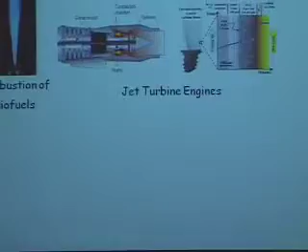Anyway, so what we've been doing is to try to understand the issues associated with how you protect these metal jet engine blades that operate actually at temperatures above their melting point. That should frighten all of you. You all take airplane trips, right? The flame temperatures in these engines actually are above the melting point of the metal alloy that's used for these jet engine blades.

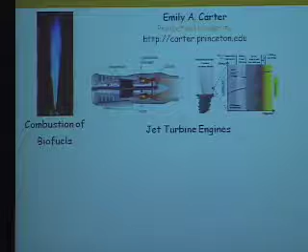How does that work? It works because they're protected by a ceramic coating, a very, very interesting multi-layer ceramic coating. We've been involved in understanding how to improve that coating so that one can operate at even higher temperatures and improve the fuel efficiency, or improve thrust if that's your goal for flying.

Okay, another area that was recently funded, we've done a little bit of work related to this. This is a very nice picture of the experimental fusion reactor that is going up in Europe that the Princeton Plasma Physics Lab has been involved in. They inspired me to start thinking about some of the materials issues associated with containing the fusion plasma. There are really important issues, as you can imagine. The temperatures get very high.

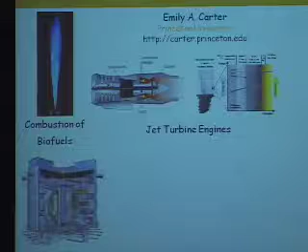There are neutron fluxes that come out of the fusion plasma, and the particular issue they asked me to think about has to do with tritium, which is a hydrogen isotope, getting into the metal that faces the plasma. So I'll talk about that very briefly.

I'll give you an example of what we do in this area and in this area, and the rest of it I'm not going to talk much about in the limited time available, but if you're interested, we can talk about it separately. Wole Soboyejo, I stole this picture from him. He works on lightweight vehicles. I also work on lightweight vehicles. We're interested in developing aluminum and magnesium alloys that can be used for lightweight cars, for any vehicle you like, ships, airplanes, cars, et cetera.

Obviously, that will improve their fuel efficiency. Another Energy Frontier Research Center that was just funded by the Department of Energy that I'm involved in, and also my colleague Miko Hataja is involved in, is looking at new materials for solid oxide fuel cells.

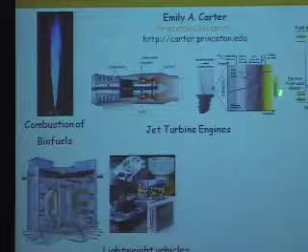The internal combustion engine is an incredibly efficient way of processing fuel. But another way that has tremendous promise for generating electricity is by taking fuels and actually running them through a cell like this that actually has the potential to be able to use dirty fuels even without problems. And so this is another mechanism for generating electricity, either from hydrogen or from hydrocarbons.

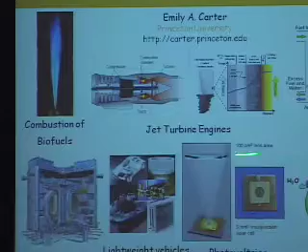And then lastly, I'll just say that I just found out that another Department of Energy grant that I had pending was funded to develop new materials for photovoltaics, so for solar cells. And I have another one pending having to do with essentially doing what's called photocatalysis, which is to take sunlight and make liquid fuels. And hopefully that's going to get funded too. So these are all the areas that we're working in.

And now I'll just spend a minute telling you, this slide is from one of my now collaborators, because he is part of the Energy Frontier Research Center. Bill Green at MIT put together this slide to just point out things that I don't even need to discuss in detail because Fred did such a good job already. But the point is we have to start thinking about a whole bunch of new fuels that are going to be coming online and how they operate, both understanding how to optimize their combustion chemistry and the fluid dynamics involved in the mixing of the chemistry and the thermodynamics with the fluid, with the gas, and how to then take that information to understand how to design new engines.

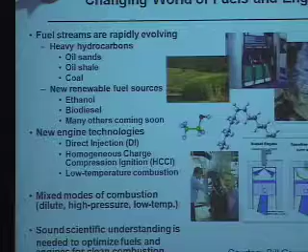There are a lot of new engine technologies that are being considered. They all have quite different regimes in terms of pressure and temperature that one needs to think about. And so this was the motivation really to go to the Department of Energy, Basic Energy Sciences, and say, we want to put together a team that goes all the way from molecules, which is where I live, all the way up to engines, to be able to optimize fuels and engines for clean combustion. And so that's my little bit here, from molecules to engines.

I should say the Department of Energy put out a call for proposals. They received 261 proposals. They funded 46 proposals. We're the only one funded on combustion. And Ed Law, who unfortunately is not here, he's the director. He suckered me into being the co-director. And we don't yet know who the associate director will be.

There are 15 people involved, including Fred and Yiguang Ju, who's listed here. Yiguang's on the steering committee. Bill Green I already introduced. There's people here from Sandia Combustion Research Facility, which is out in California, who are experts, and then also experts from other universities, as well as someone from Argonne National Labs. And the idea is that all of us together are going to cover these areas of expertise, both theory and experiment, chemistry, flames in terms of the fluid dynamics, and also engine design. And so this is really nascent. The money is not here yet. Okay, so we're just starting to think about how to put this together, and we're all very excited about it.

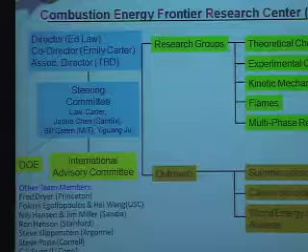So, do I have a minute or not? Am I done? Should I be done? Okay, I'll just do this one slide then. I hate it when people go over, and I don't want to be a hypocrite.

So anyway, this is just one example of the kinds of things we do in terms of materials. We are interested right now in the material tungsten, which is the prototype for one of the interior portions of this fusion reactor. And there are good reasons why one might want to use tungsten. You remember tungsten is actually the filament inside your light bulb, and it happens to be able to exist at very high temperatures, and that's a good thing. It has a high melting point. Also, it's a good neutron absorber.

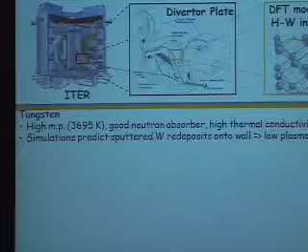And the question that Princeton Plasma Physics Lab posed to me was, how easily does it incorporate hydrogen or its isotopes? Because it's going to get bombarded with those materials, and we're very concerned about that because hydrogen in metals often causes problems. It's an actor in corrosion, and so we've actually looked at this now. We haven't actually looked at the problem of a neutron hitting metals, but we know that when neutrons hit metals, they knock atoms out of place.

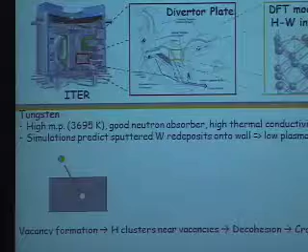They form vacancies. Missing atoms are there. That's what this is supposed to mean. And it turns out that hydrogen loves those vacancies. They just go straight to the vacancies, and they live, many of them, live. That should have been an atom right there, and hydrogen, up to 6 hydrogen atoms can collect around those vacancies.

And when you have that many hydrogen atoms, what we are able to do is calculate essentially what we call an embrittlement function. When you gather that much hydrogen together, it essentially makes the material crack and blister. And so we made some predictions about how likely that happens as a function of temperature, which could be very useful in trying to understand how to look to optimize a tungsten alloy that will inhibit hydrogen incorporation. We've already done that kind of thing for steel.

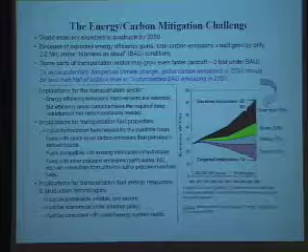And it's partly because of the size of the amount of energy that's being fluxed through the transportation system, as well as its source, which is principally petroleum. As such, we have to worry about backward compatibility for very large amounts of capital investment in terms of transportation systems, and also forward design issues. As we look at those issues, we can see that we want to keep some compatibility with the existing processing issues of petroleum.

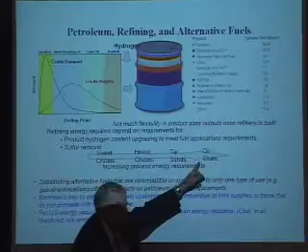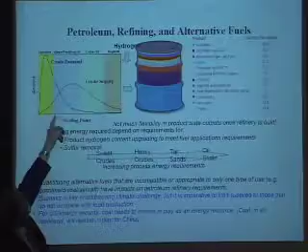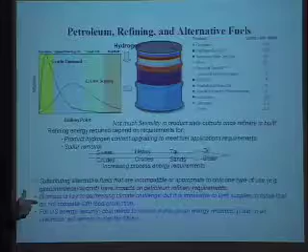And what I want to emphasize is 2 points here. One is as we go from Saudi Arabian petroleum to the kinds of things we'll be using for petroleum in the future, the amount of energy processing requirement becomes very severe, principally because of hydrogen content in these fuels and the hydrogen upgrading necessary to shift the amount of hydrogen in the system towards what we want to use in real systems. This introduces a whole series of areas for producing hydrogen that are very important, but I think everyone now agrees that biomass is going to be a key to addressing these climate issues.

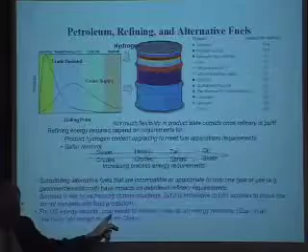The difficulty is that if we look at all of the renewable resources, including biomass, those numbers do not compare well with the total amount of energy production that we really require. For the US as well, we have a very large amount of coal that's being used in electricity, and we know that China is going to increase its use in this area as well. So how do we deal with this?

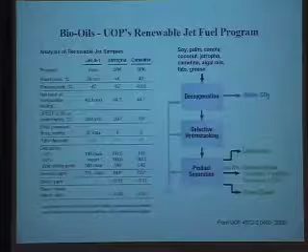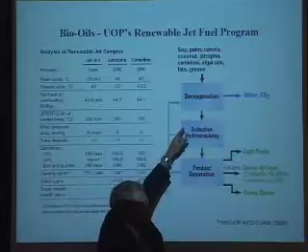Well, there's at least 2 ways to process biomass. This is representative of one. I grow materials that have very high oil content. I extract the oil. I process the oil. And now you'll notice no oxygen in these systems. These are not the typical kinds of ethanol things that you and I are used to. They are now fully hydrocarbon compatible with petroleum products, as you see here on the left.

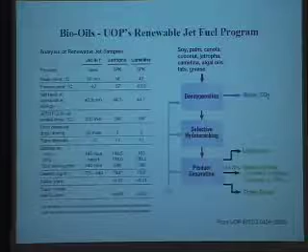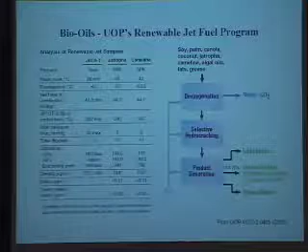I want to note one other thing here that's very important. These are the kinds of properties that are used to define what I put in a jet engine. If I go to a gasoline station and I collect gasoline today, tomorrow it's not the same. Next December, it's not the same at all. And if I do that in Asia or I do that here, it's very different. The question is how do I integrate these alternative fuels into those kind of problems? And this is why I need very strong compatibility.

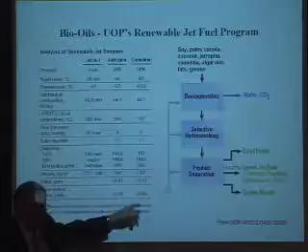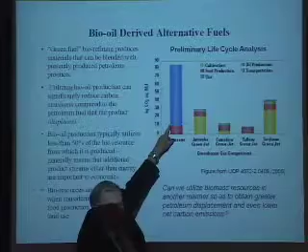Now, why is this important? Because in comparison to kerosene derived from petroleum, this is the huge CO2 emission that would have come from burning petroleum.

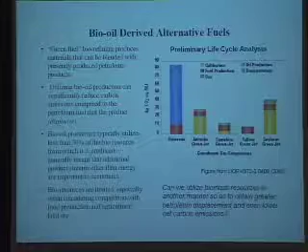But if I use any of these other oils, that CO2 emission is replaced by the fact I photosynthetically captured the CO2 from the atmosphere. The problem is, each one of these oils represents only about 40% of the mass of the biomaterial I grew, and the biomaterial that I'm using is very resource limited. So the amount of fuel replacement that I can get is very limited this way.

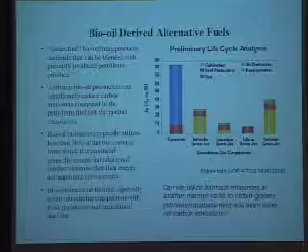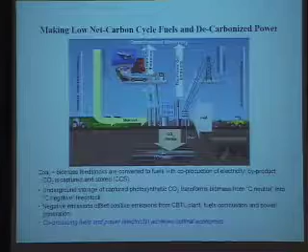Can I use it better another way? This is the other way. Not only can I use it better, but I can also develop ways of using coal. You've all seen the clean coal ads recently. It really is clean. The idea is to use photosynthetic sequestration of CO2 from the atmosphere to displace the CO2 that's going to be present in the fuel when it is burned.

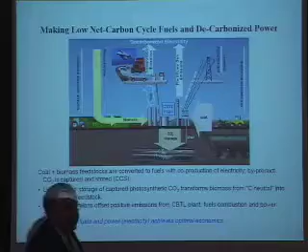I'm going to combine it with coal. I'm going to generate a liquid fuel. I'm going to simultaneously generate electricity. So I'm replacing both the electrical generation market and the transportation fuel market simultaneously. The co-production of fuels and power turns out to achieve extremely good optimal economics with very good solutions of many of the environmental problems.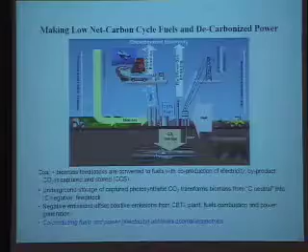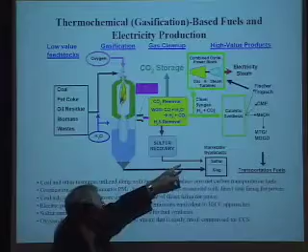Important here is that I can also eliminate very large amounts of the nanoparticle emissions that occur from pulverized coal firing by replacing it with gasification as the means of making my gasified streams. In order to do synthetic fuel conversion, I need to remove sulfur, so I end up with very low sulfur fuels this way. In addition, I'm going to process some of the synthetic gases to power right on site. And you'll notice I've got two routes to that, one this way, one that way, that I can also use liquid fuels with it. This is to balance the two processes.

So oxygen firing of such a gasification system also produces a CO2 stream, which is very pure in its process, can be dried easily, can be compressed, and can be carbon sequestered and stored. That's the key to this technology. How big of an advantage is this? As I showed you here, we got about an 85% reduction in C emissions.

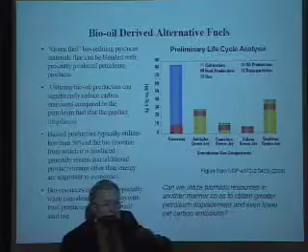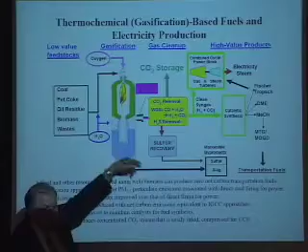If I do this purely with biomass in this problem, bio to liquids plus electricity, I get a minus 22% carbon reduction in comparison to petroleum. If I do this with 38% biomass with coal, I get a 0 net carbon cycle out of this process. I'd be happy to share more about the economics of this. This comes from an analysis with my colleagues, Bob Williams, Eric Larson, and the Princeton Environmental Institute here.

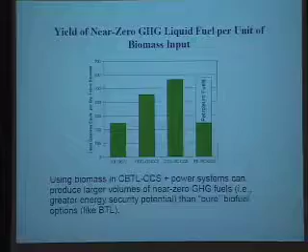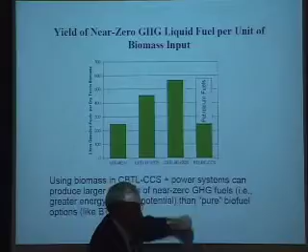So you can see that if I use one of these processes of CBTL, coal plus biomass to liquids with full recycle, carbon capture and storage, or once through, I can generate very good economic solutions to this problem. Turns out the one that produces the most liquid fuel is not the best. This is. It's called systems analysis. I need to know a lot about heat rejection in these systems and its quality to pick that one.

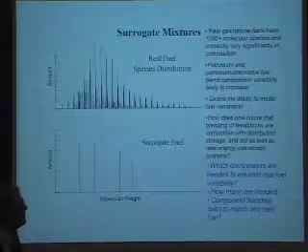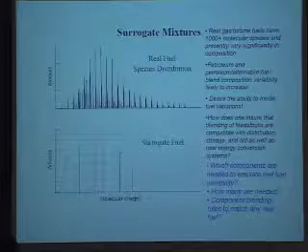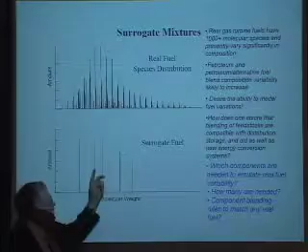Okay, well, now what's the problem? This all looks very simple. The problem is this is what the molecular weight distribution looks like in any of the fuels we use for transportation. And we don't know how all of those little molecular weight distributions change every time I make an alternative fuel. I need to find ways of compatibility between alternative fuels and petroleum so I don't disrupt the distribution or storage or utility in any of these systems.

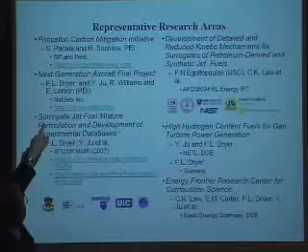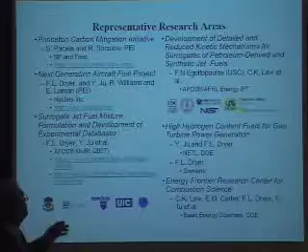So these are the questions that need to be answered, and these are the questions that the Thermal Sciences Group are addressing. We have a number of projects. We have a project called the Carbon Mitigation Initiative that's directed out of PEI, which Steve Pacala and Rob Socolow are the PIs. It's funded by BP and Ford. We have a next generation aircraft fuel project looking specifically at this problem for aircraft fuels and for producing very low net carbon emissions and particulates. That's PI'd by me and involves the people you'll note here, all at Princeton.

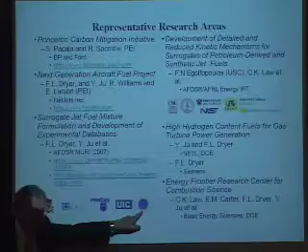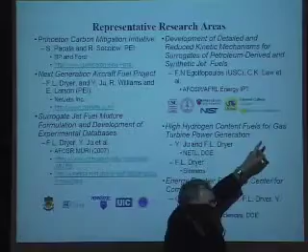We have an Air Force MURI program, which involves a number of other institutions and PEI as well. And we are looking at how to model real fuels with what are called surrogate mixtures of small numbers of molecules. A similar program involves Professor Law. That's stationed on the West Coast, PI'd by Professor Egolfopoulos at USC. You'll notice another set of industries, and you'll note who's funding this. Air Force is a big player in this area.

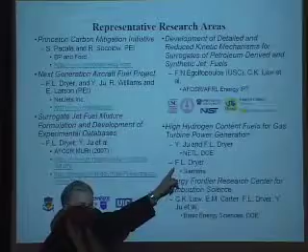And finally, we have hydrogen combustion in gas turbines. This is an issue with the syngas power generation problem and controlling emissions. We've been working with NETL and also Siemens. And finally, just recently, we have gotten an Energy Frontier Research Center award from Basic Energy Sciences, which Emily will tell you a little bit more about.

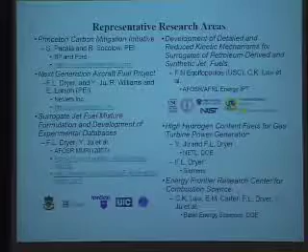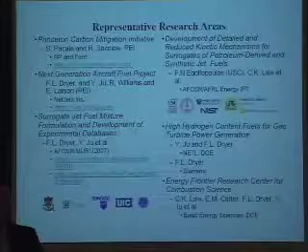So this gives you a kind of a broad picture of what thermal sciences is involved in here. We work on the fire safety aspects of this, on the fuel property aspects, and you'll notice the kinds of things you're talking about in terms of real-time sensing are very important for control of these kinds of systems.

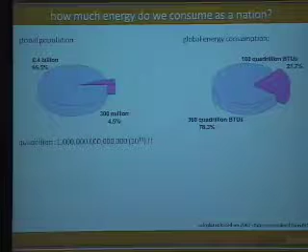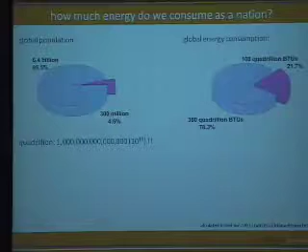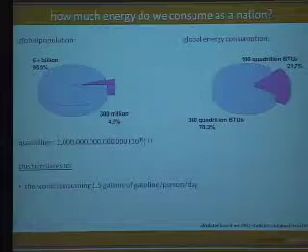Of those 460 quadrillion BTUs, about 100 quadrillion BTUs is being consumed in the United States. Okay? Those are all big numbers. So what do these big numbers mean? If you take these numbers, divide by the population, and then divide by the number of days there are in a year, and then divide by, let's say, the energy density of gasoline, what you get out is that the world consumes energy equivalent to 1.5 gallons of gasoline per person per day. And the United States consumes energy equivalent to 7.5 gallons of gasoline per person per day.

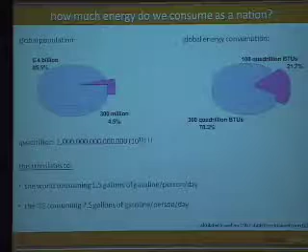So this is quite an alarmingly large number, considering that we probably don't even drink a gallon of water per person per day, okay? And from this number, you'd gather that there is an imminent need for us to find renewable energy that is A, sustainable, B, has negligible impact on the environment. And that's why we look towards the sun.

So I'm showing you here the spectral irradiance of the sun. Okay, the solar irradiance is at 1 kilowatt per meter squared. And if you take those units, what this means is the annual sunlight gives energy at about 3.6 million quadrillion BTUs. If you do that same kind of analysis, what this means is if we can effectively and efficiently harness solar energy for an hour, that's enough to power human activity across the globe for an entire year. Hence, this motivation and this drive for solar energy and solar research.

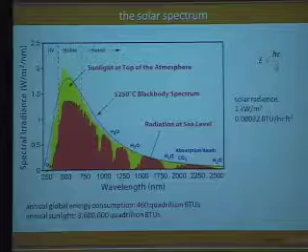So solar cells are used to convert sunlight to electrical energy. First-gen solar cells are these single crystalline type silicon devices. The thermodynamic efficiency, so this is the maximum achievable efficiency that these devices can hit, is about 33%. In the lab, they've been demonstrated to be between 20 to 25%.

Now, if you incorporate them as modules and you put them on roofs, their efficiency drops a little bit, so it's about 18%. The biggest problem with these first-generation solar cells is the cost. Okay? They're way too expensive compared to coal.

So there's this next generation or second generation solar cells. These are thin film devices, so they're polycrystalline. That drops the cost significantly, but here you take a hit in the efficiency as well. The materials that are used to make these thin film devices are cadmium telluride, for example. They're rare earth metals. They could be toxic.

And so we wanted to ask a different question. So I'm plotting here efficiency as a function of cost, reminding you that Gen 1 solar cells are right about here. Gen 2 solar cells are right here, so these are the thin film devices. Gen 3 devices we didn't talk about. These are the ones with fancier architecture, and so they're more expensive, but they're also more efficient.

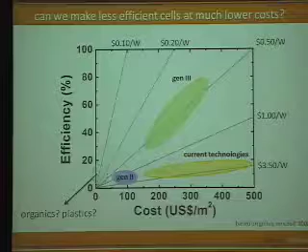What the organic electronics community is asking is whether we can target right about there. We take a hit in efficiency, but we can dramatically lower costs. Indeed, market analysis that's been done has shown that if we can make about 10% efficient devices, we're in business, okay? So that's the question we want to ask.

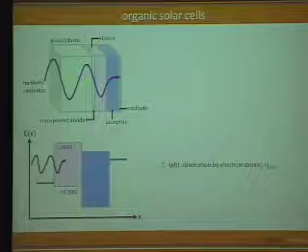Just quickly, let me show you how an organic solar cell is built and how it works. So here you typically start out with a glass or a plastic substrate, okay? You have a transparent anode, and then you put down your organic layers. You need an organic electron donor, and you need an electron acceptor. And then you put on your cathode.

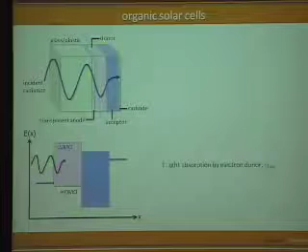So here are energy levels that are associated with the donor and the acceptor. So this is the LUMO level and the HOMO level, or the conduction band and the valence band. And so when you shine light, light gets absorbed in the donor, and then you generate an exciton. This is a tightly bound electron and hole pair. The electron then shifts to the LUMO level, and the hole remains in the HOMO level, and these get collected at the external electrodes.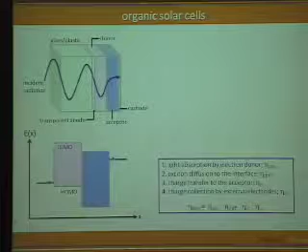So solar cells are inherently not very efficient devices. Organic solar cells especially are not very efficient. The highest efficiency that's been reported a couple years ago is about 6%. Okay? And you can begin to understand why that is the case. The efficiency that's associated with a device is a compound of all these different efficiencies. So if you have one single step that's not efficient, that sort of propagates onwards.

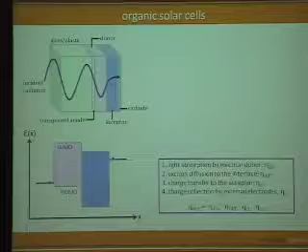Now, I'd like to call your attention back to how these devices are made. You'll notice that these devices are often built from the bottom up. Okay? You put down one layer, and then you put down the second layer, you put down the third layer. And that's because we're following what's been established for the silicon industry. But organic is a completely different beast. They're frequently mechanically and chemically fragile.

And so if you're using the same technologies to put down and pattern the cathode, for example, on the organic layers, you can potentially damage the organic layers. And so what we'd like to focus on is come up with non-invasive processing technologies to make these devices.

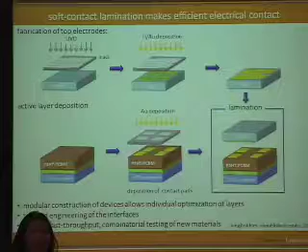So here in this example, I'm showing you how we can laminate to make organic devices. So the idea here is as follows. You want to make these devices separately, okay, the different components separately. And then in one final step, you bring them together. So in this example, we've basically patterned and deposited electrodes separate from the active layer.

Here we're using polydimethylsiloxane. This is silicone. This has the same chemical structure as the RTV that you use to caulk your bathtub. You can pattern and deposit your electrodes without harming the photoactive layer. And then when you're ready, you laminate to make contact.

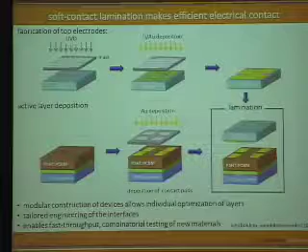Now, there are several merits associated with this lamination procedure. First of all, you have this modular construction of devices, so you can individually optimize the different layers. Second of all, you have custom engineering of the interfaces. So I've mentioned that charge extraction is a problem. You can imagine putting down chemical species here that can enhance charge extraction. And this is something that you can't easily do when you're building things from the bottom up. Finally, you can imagine doing this over large areas.

And if you do this over a large area, it can potentially enhance fast throughput combinatorial testing of new materials. So we're working with a chemist right now who's going to synthesize a bunch of these new materials, and so we can inkjet print them down and laminate and test them really quickly combinatorially.

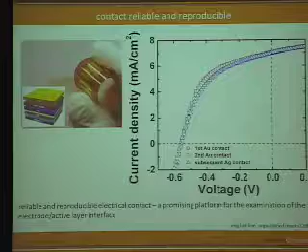So I wanted to show some data. So here are current density plotted against voltage for different contacts that we've made to the same photoactive layer. So we're putting down one contact, we're taking it off, we're putting down a second one, and then we're taking it off and we're putting down a third one. The point of this graph is to show you that this technique is actually really robust. It does not depend on the contact that you're making. What you're testing really is the characteristics of the photoactive layer.

Now looking to the future, how scalable is this process? We believe this process is scalable and it's compatible to roll-to-roll processing. So these are processing technologies that have been developed and established for the newspaper industry, for magazines and whatnot. And if you take potato chip bags, for example, where they're depositing aluminum, and these are the specifications for depositing aluminum, if you use those specifications as a benchmark, you only really need about 100 machines to operate for a year to make 10% efficient solar cells.

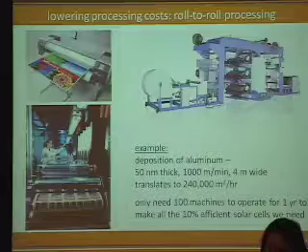Now, of course, I'm not saying that organic solar is the way to go, but using the sun is clearly going to be one of the ways, and we think this is a good way to move forward. So just to show you that printing is possible, these aren't solar cells, but these are sort of backplanes for displays that we've printed using sort of similar technologies.

So I'd like to spend the next few minutes telling you a little bit about the Andlinger Center and some of the logistics about this meeting. The Andlinger Center, as many of you may know, was established in July of 2008, thanks to an extraordinary gift from Princeton alumnus and international business leader Gerhard Andlinger. The center has 3 core areas of research.

So we would like the center to support a vibrant research and teaching program with a focus on 3 things: developing new alternative energy sources, improving the efficiency of devices that consume and generate energy today, and inventing and improving carbon capture and storage techniques that will enhance our ability to reduce the amount of CO2 entering the atmosphere. So these are 3 broad themes.

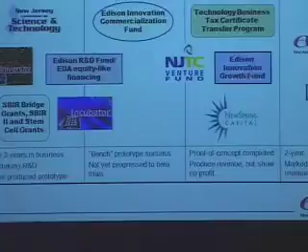As you move along the curve, we have an Edison Innovation Suite of programs. Those are the programs that I represent. And the reason why we have a specialized team is our partners are primarily the venture capital firms, the angel investors, equity funds. And so these are the companies that are startups primarily. They don't have revenues, there are losses. And they really require a specialized team and specialized type of financing.

Versus the more traditional mature companies, and there's a group at the Economic Development Authority for those traditional companies, where they look for a 2-year profitable history. You can imagine that those are the companies that really partner with our commercial banks. So we like to say that we have financing that goes from the very, very early prototype stage, and then we move forward to very advanced and larger companies.

But we are there to support the technology industry, and especially clean technology. And the focus here is really what we're doing to really support that in the state. And so there's a New Jersey Energy Master Plan. It was released in October 2008. It's supposed to be updated every 3 years. I think it was quite a long time before this one came out.

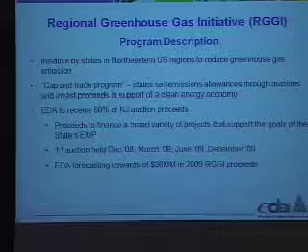And then this is the program that will be launched on Monday from the proceeds from the Cap and Trade program. And these are the categories of fund uses. So if you're installing equipment for combined heat and power, for end-use energy efficiency projects, and that does include solar, state-of-the-art projects, and innovative carbon emission abatement technologies, this would apply.

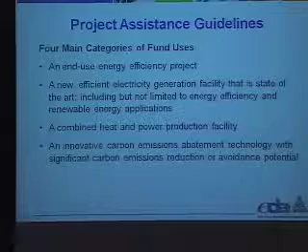I would mention that for any type of solar installations, they've modified it so that while this is a grant and zero interest rate program up to $5 million, for those that are solar projects, because it's heavily incentivized, it's going to be loan only, and it could be repaid from solar renewable energy certificates. So these are the guidelines that will be introduced on the website on Monday. 1 million is the minimum, a very attractive interest rate. You're not going to get that in the private sector. And a long repayment period, as you can see, up to 20 years.